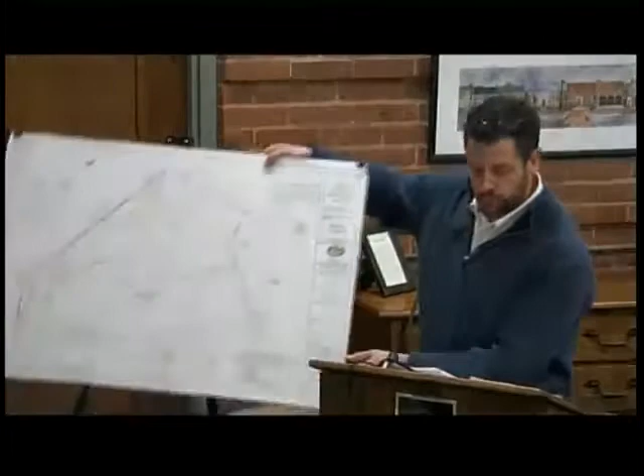4 wetland resource areas exist on or adjacent to the property. 2 are on the property. Those are flag Series 1 and 2, which you can see on this graphic. The buffer zones from the off-site wetlands and the airport property do extend on to the parcels. The site is not located in mapped rare species habitat, nor is any aspect of the project or the site located in the 100-year floodplain. It's all high and dry. So that's existing conditions. And again, the wetland lines on this graphic reflect those which were approved by the commission through the ANRAD.

So Jan, I'm putting up the overall grading plan sheet from the notice of intent set. So again, most of the project is outside the buffer zone. It does have 2 elements to it. It has a commercial development, which is to the front of the site, and those are buildings 1 through 4. Here. Those 4 separate commercial buildings will be primarily for retail use, banks, restaurants. None of the buildings, foundation work, et cetera, are located in the buffer zone. And again, those are buildings 1 through 4. And the sheet I'm looking at, folks, is the overall grading plan sheet.

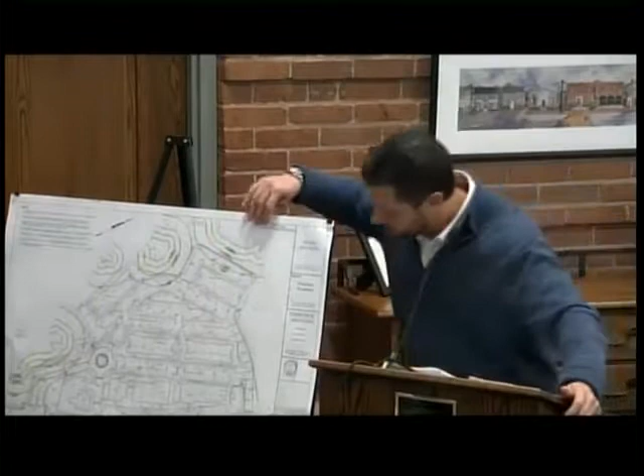Got it? Okay. If I go too fast or too slow, please let me know. And I have a very orchestrated presentation here, though, Mr. Lynch. All the boards are lined up, so hopefully this will go smoothly.

The balance of the project is the residential component. We are proposing, or our clients are proposing, construction of 4 residential buildings. Each of the buildings are 4 stories high with 48 units in each building. 3 of the residential buildings are located outside the 100-foot buffer zone. Only a corner of the 4th residential building, identified as Building D, which is at the back of the property, near the western property line, is located in the 100-foot buffer zone. That building's roughly 72 feet away from the wetland flag Series 3.

There is a perimeter access drive proposed around the rear of the building. That is outside the 50-foot no construction zone from, again, wetland Series 3. There is a retaining wall proposed in this location and in other locations on the site, and I'll spend a few more minutes on that in a minute. But one of the primary functions of the retaining walls is it does enable us to stay out of the no disturbance zone and the no build zones.

The only other building that is located in the 100-foot buffer zone is the proposed clubhouse and leasing office building that is located at the front of the site. I'm just going to point to this map for you. Right here. So again, that's the clubhouse leasing office for the residential component of the project. There is a swimming pool proposed behind that, as you can see in the plans. That's for the residents. Again, those structures are outside the commission's 50-foot no construction zone from wetland Series 1. So again, no waivers requested in that location.

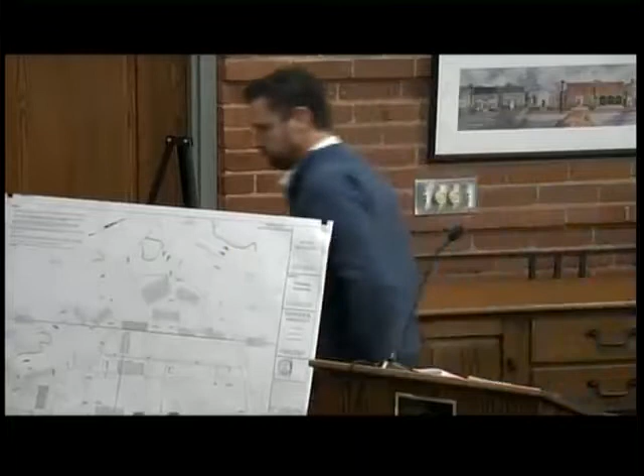It's an 8-inch diameter line. The balance of the water line work extends outside the buffer zone from that point forward. The proposed sewer line connection will occur at an existing manhole located on Route 125. That connection is outside the buffer zone, but roughly 160 feet of the 6-inch diameter sewer line is located in the buffer zone, where it eventually ties into a proposed pump station located on the north side of residential building D, which I'll point out in a minute.

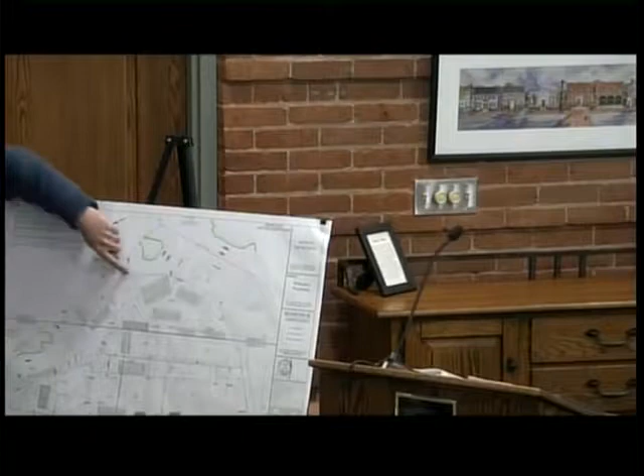That pump station is similarly located outside of your 50-foot no-build zone. It's roughly 76 feet away from the wetlands, and I'll just point that out for you. So that's just an overview of utilities. I'm going to switch now to the retaining wall layout sheet.

So we are proposing to use a combination of both modular block and fieldstone retaining walls to prepare the balance of the site in the grading associated with the development. I think I'm just going to step away from the mic and just refer to the sheet. I think Joe did a nice job kind of coding this sheet. And again, it's sheet RET in your set. Yep.

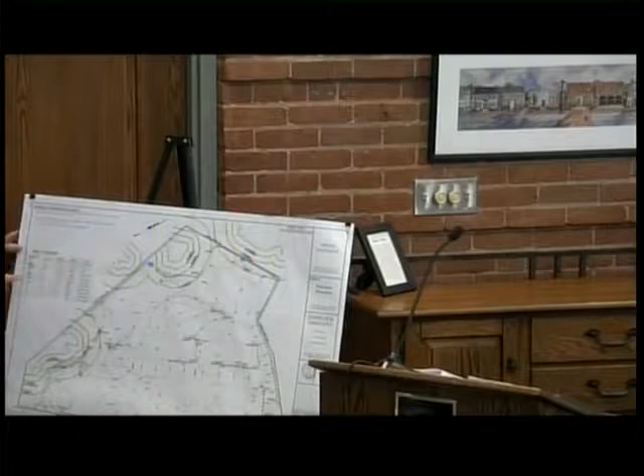So, again, looking at that sheet RET, I've just highlighted in blue the retaining walls that fall within the commission's jurisdiction within the buffer zone. And what Joe did with his plan work is he coded the different types of walls, and the table shows the length, the height, and the type of wall in those different locations. So 4 sections of walls, R1, R2, R4, and R5, those are what are located in the 100-foot buffer zone. I'm just going to start you with R1, which is over here, folks.

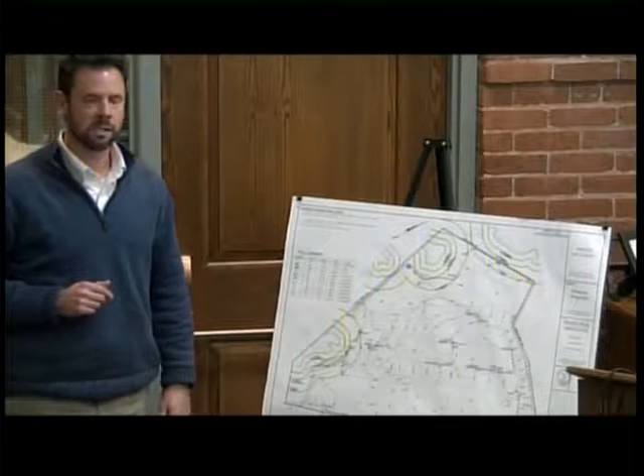You got a different plan than we have. Am I going too fast, guys? Everybody good still? Our retaining wall plan's different. Yeah, you got a different plan than we have. Yeah. They're different and they're not bound right, so we're kind of jumping around. The binding isn't their issue, they didn't do that. Donna printed those for you guys. Okay, gotcha.

Well, the buildings aren't on his, from what I can see. We have the buildings on ours. No, their buildings are. Are they on there? Yeah. Very last sheet. I'm looking at it, I don't know how different, but it's different than what we're looking at. The buildings are far more prominent on our sheet, and the retaining wall is a little harder to see. All right, well, it's the same sheet, the plotting is just making things lighter or darker. The information's all the same. So let me walk you through it, Joe, if something's not matched up.

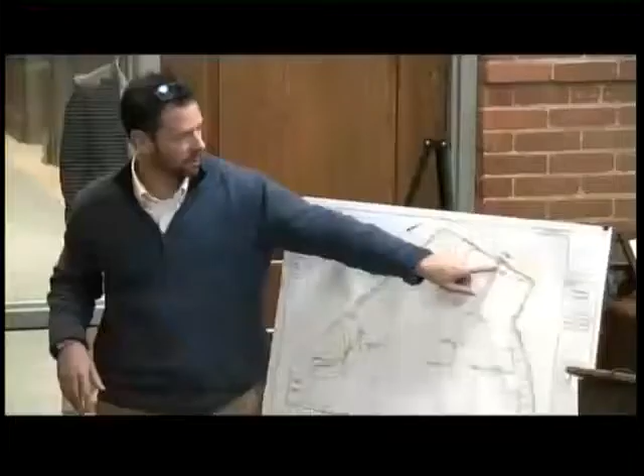But let me just use R1 as an example. Okay, so R1 is right up here. Bear with me so far. So R1 is in the buffer zone. It's a block-type wall. That wall is about 850 feet in length. Not all of it's in the buffer zone, but a chunk of it is. The height of that wall ranges from 2 feet to 9 feet in height, okay?

Segment R2, which I'm pointing to here in the figure, where this segment begins. Everybody with me? That is also a block wall. That wall is about 8 to 16 feet in height.

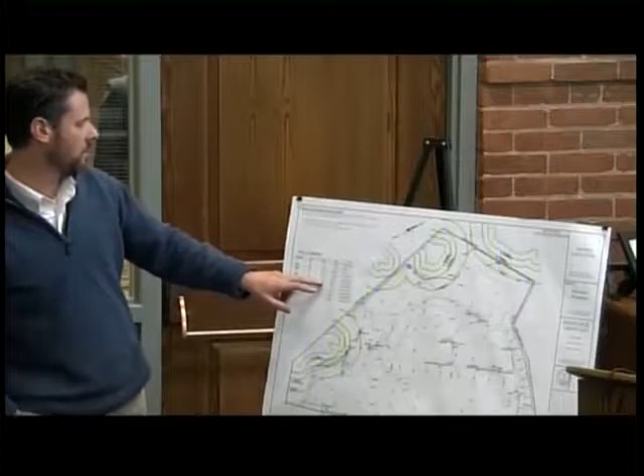I'm going to jump to wall R4, which is over here at the site entrance, coming in the southern entrance drive. That's a field stone wall that ranges in height from 5 feet to 11 feet. And then lastly, wall R5, which again is close to R4 near the entrance to the site. That is a field stone wall, and that wall ranges in height from 3 feet to 16 feet. And we can talk more about some of those details when I work my way through this presentation.

So the retaining walls are obviously an important part to our development of the site with regards to the cut and fills and how we develop the site, where we want to keep sediment and out of the resource areas. The site will have a net fill, approximately 40,000 cubic yards, being brought to the site. Again, Joe, you'll correct me if my numbers are wrong. As the fill is being brought in, the retaining walls will be advanced upward. And Jen, Joe described this generally in an email he sent to you, I think yesterday.

Once those walls have started, the area between the wall and the limit of work can be loamed, seeded, stabilized. We can work the grading back towards the site. You're going to see in a minute a sheet where I depict some of our sedimentation erosion control measures, but they're obviously a big part of our development. One of the first early action items to starting work on the site is getting those walls in, working our way back, and using those as a measure to keep erosion and whatnot within our footprint.

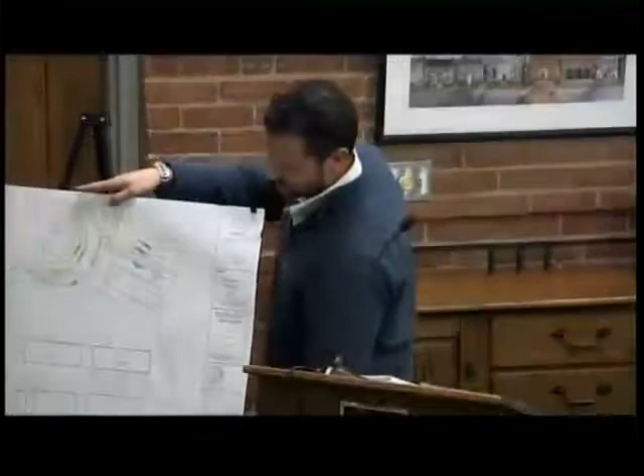All right, so staying on the theme of the walls and erosion and sediment control on the site. As I mentioned before, as the walls rise, we can keep the fill in a negative slope away from the wall and the wetlands towards where we're depicting some of these temporary sediment BMPs, which the Commission is familiar with on this site from some prior projects where that BMP has been employed during construction. As with prior filings, that type of BMP will be moved and developed throughout the site as the site is advanced, and will be constructed where necessary to collect and control sediment so it doesn't reach the wetlands.

Once the wall and site have reached 2 to 3 feet, plus or minus, from their final elevations, the building pads, utilities work, things of that nature can start, and at that point, we should have a fairly stable site. And again, we can talk about this more specifically in a minute. This graphic shows the potential locations of these temporary sediment basins. Right now, we're showing 6. Their configurations and locations will depend on site-specific conditions during the time of construction.

Just briefly, with regards to some other erosion control measures, we'll have stabilized construction access points at both the southern and northern end of the site. The erosion controls around the perimeter, Jen and I had some brief discussions about this, which we'll firm up. A combination of silt fence and/or compost tubes, hay bales, straw wattles, whatever the commission determines is necessary, and we're happy to work with the commission and Jen on whatever those controls might be.

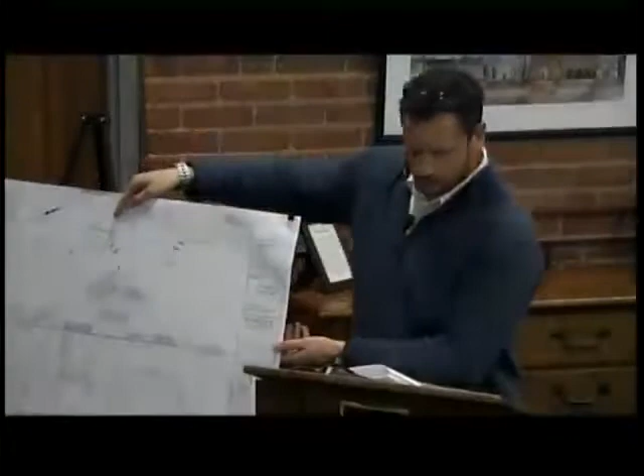I'm just going to go back to the utility sheet just because it's a good overview sheet to present from, but just turning to stormwater management. Again, Joe can elaborate on this as necessary when we start responding to some of your questions. But generally speaking, the stormwater management system consists of a series of BMPs that will obviously collect, treat, control stormwater runoff at the site. They include a combination of deep sump hooded catch basins, water quality treatment units, and an underground system of infiltration and detention structures.

We are proposing a total of 5 new stormwater discharge points. Those 5 locations are in the buffer zone, but none of them encroach into your 50-foot no-build zones. We're not asking for relief from that setback for those discharge points. And again, I know Lisa Eggleston's been reviewing this, at least as part of the planning board process up until now. And again, Joe can get into this more in a bit.

And then lastly, as I mentioned during my opening comments, during the ANRAD review process, I told the commission, I told Jen, we'd go identify those locations of the buffer zone where some of the clearing occurred to do the geotechnical boring work and test pit work, where there would be no other work proposed as part of this filing. Those 2 locations that I've identified are shown in gray, at least on the screen behind you. It doesn't show up as well in my board. I've highlighted them in green. There's 2 locations. Area 2 is roughly 1,700 square feet in size, and Area 1 is about 700 square feet in size, plus or minus.

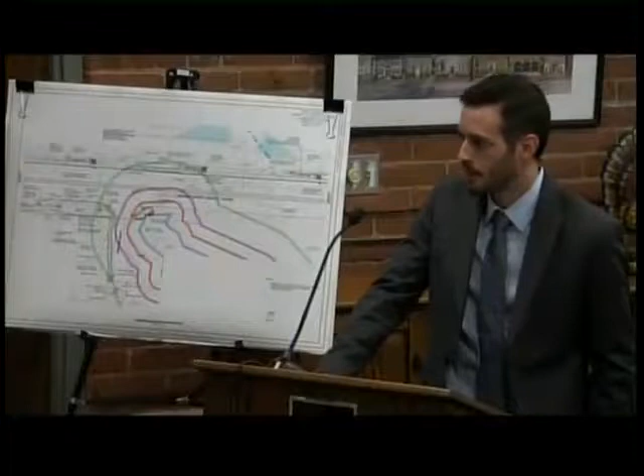So they do need a waiver, correct, for the head wall work? So that's a waiver of the no disturb, no build zone, or it's a no disturb zone. It's technically not filed under the bylaw. I think we went through that last... Oh, right. So we are within that zone, but I don't think a formal waiver was requested. Sorry, I just got to thinking about what was where. So it would be just to close an issue at this point if there's no further concerns.

There's no waiver requested? No, because they agreed to meet the bylaw standards where possible and to address the off-site isolated wetlands on Royal Crest without formally filing under the bylaw. I think that's how we agreed at the last meeting we would handle this. I'll move we close the issue. Thank you very much.

Getting that new stand. Excuse me. Oh, everybody's got that cough. Get the receipts. That's the way to work. That's the way to do it.

Okay, next one is enforcement orders. I know. I got you. 242, 1415, 233 Johnson Street. That's you, yep. So this, I know you're familiar with this site because it was before you not long ago for a certificate of compliance. This is the property on Johnson Street with the pond and spillway. Let me just grab my photos.

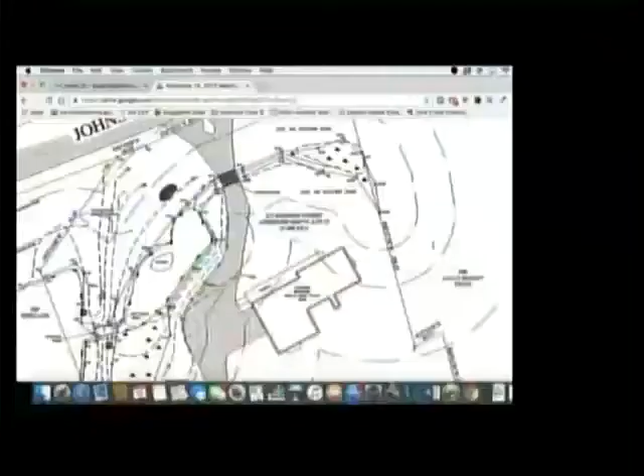So my recollection in 2007 was, and I may have the consultant wrong, I think it was Ben Osgood maybe represented you. It was Ben Osgood. Came in for concern with the embankment, the structural integrity of the embankment that seemed to have been weeping water, or maybe was prone to, not going to say failure, but certainly prone to further deterioration. It wasn't simply the berm, the embankment, it was the dam itself. Yeah, it was the spillway, all rocks. Indeed, the spillway.

Yeah. It was a danger, I had to jump, and you could actually look down 5 or 6 feet, and there was no support there. They were just giant boulders. I think that predates you, Jen, but I remember Benny Osgood, though I have less specific recollection of the level of detail that we got into. But I can't imagine that we didn't talk about the importance of the waterway and the resource area. Those things would have come out.

I mean, I'm slowing down, but I haven't stopped yet. What I happen to think is we had an existing pre-existing condition, with whatever the yard condition was, manicured, not manicured, landscaped, not landscaped. I think I'm hearing an admission that he might have made a mistake. The resource area is the resource area. I don't think we're going to waver on that. Hopefully you understand why the resource area is important.

But I think what it comes down to is, I think it would be unfair to a person who's come in and addressed stability right away and tried to do some things to make things right in the short term, and then looking to do things in the longer term. I wouldn't be looking to reclaim buffer zone or revegetation or return it to some sort of natural state which wasn't previously there.